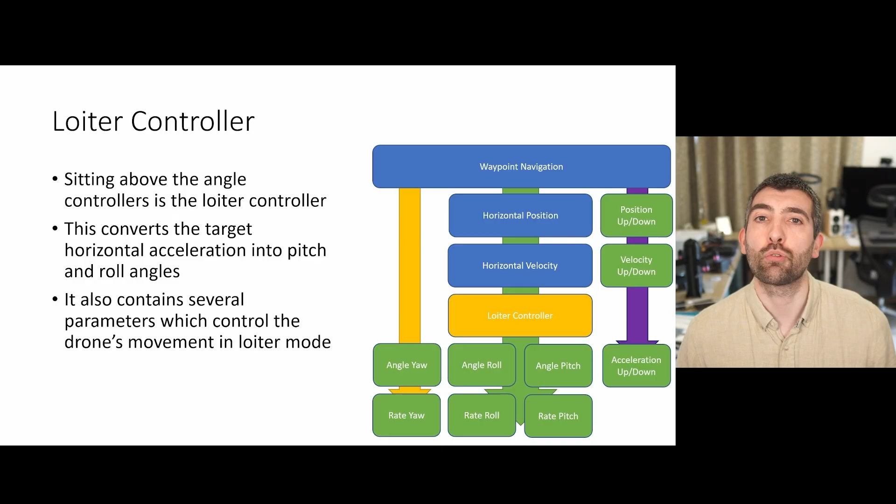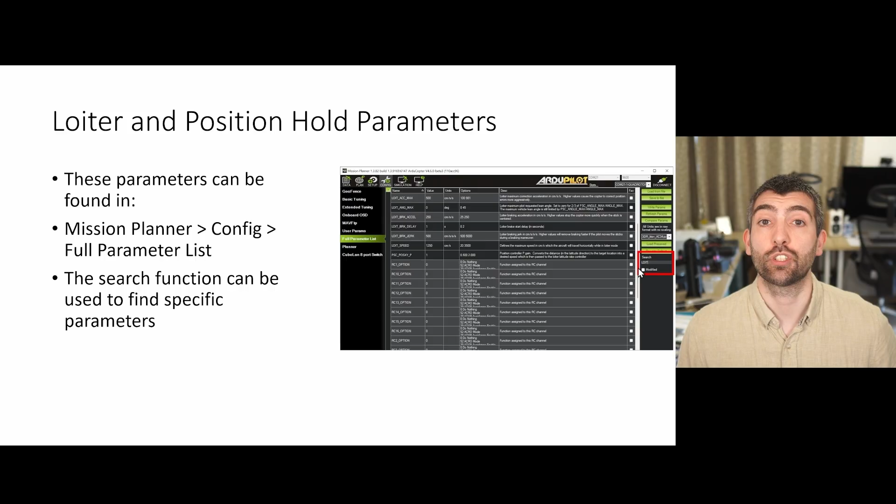So we're not going to have to tune the PIDs for the Loiter Controller, but we are going to have to look at these secondary parameters which control how the Loiter Controller behaves in order to get the right flight feel for the drone. All of the parameters we're going to be talking about today can be found in Mission Planner under the Config tab, Full Parameter List, and then you can use the search box to zero in on the specific parameters that you need to adjust. Here are the parameters that you're going to need to be aware of.

The first is LOIT_ACC_MAX, which is the maximum acceleration that the Loiter Controller is going to use to correct position errors. The higher this acceleration, the more rapidly the drone will move to correct position errors and the more aggressive it will be. LOIT_ANG_MAX is the maximum lean angle in position hold mode, and this is usually set equal to ANGLE_MAX so that the flight feel in stabilize, altitude hold and loiter mode is the same for the pilot because they have the same maximum tilt angles in all the modes.

LOIT_BRK_ACCEL is the maximum braking acceleration that the Loiter Controller will use when the stick is centered. So if you're flying along with the drone at a certain speed and you center the stick, the drone will brake to slow down, and the LOIT_BRK_ACCEL parameter controls how aggressively it brakes. There's also a LOIT_BRK_DELAY if you wanted the drone to not respond immediately to centering the stick. In most cases, you're going to want to set this to 0 because there is nothing more scary for a pilot than requesting the drone to slow down and it not respond immediately.

LOIT_SPEED is the maximum speed that the drone is going to travel in loiter mode. So at full stick deflection, that's how fast the drone is going to move. And LOIT_BRK_JERK is the maximum braking jerk.

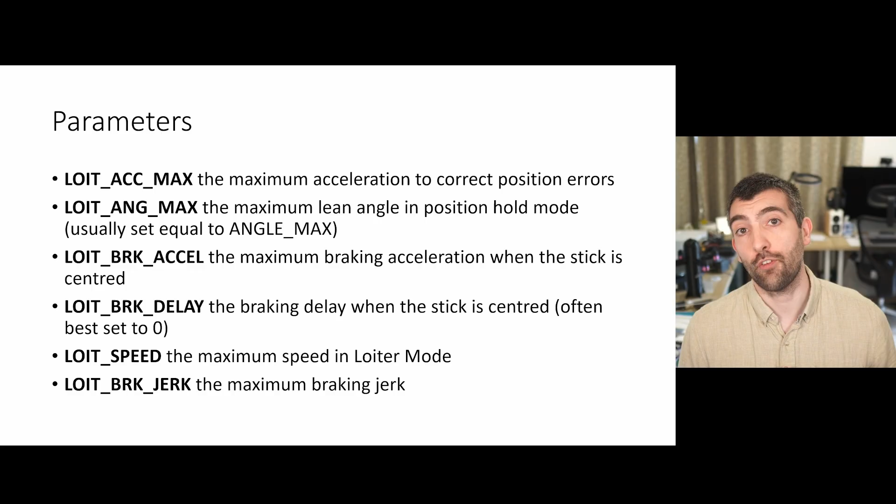Now, jerk is the derivative of acceleration, and we're going to come across this with a lot of the other controllers. This effectively controls how quickly the drone reaches its maximum braking acceleration. So the higher the jerk value, the faster the drone will reach its maximum braking acceleration, and then it will slow down.

I think it's easiest to understand these parameters by looking at them on a graph of speed versus time. So here we have the drone moving along at its maximum speed, so its loiter speed. Then on this yellow arrow, the pilot centers the stick. At this point, Loit brake delay controls how long the drone waits before starting to respond to the fact that the stick has been centered. So I would normally set this to 0, obviously, so that it responds immediately.

Loiter brake jerk will control how quickly the drone starts decelerating and how quickly it reaches its maximum deceleration value. The maximum deceleration value is controlled by Loiter Brake Accel. And then the drone will decelerate at that constant rate of deceleration all the way until it's nearly stopped.

And then Loiter Brake Jerk also controls how the drone kind of finishes off the deceleration and comes to a dead stop. The larger the value of Loiter Brake Jerk, the more rapidly the drone will come to a dead stop at the end of its braking maneuver, and the less drift you'll see at the end of the move.

So these parameters are not really parameters that are tuned in the traditional sense, because there's no ideal value for a particular drone. It all comes down to the application and the pilot feel, how you want the drone to feel when it's flying around in loiter mode as to what these values should be.

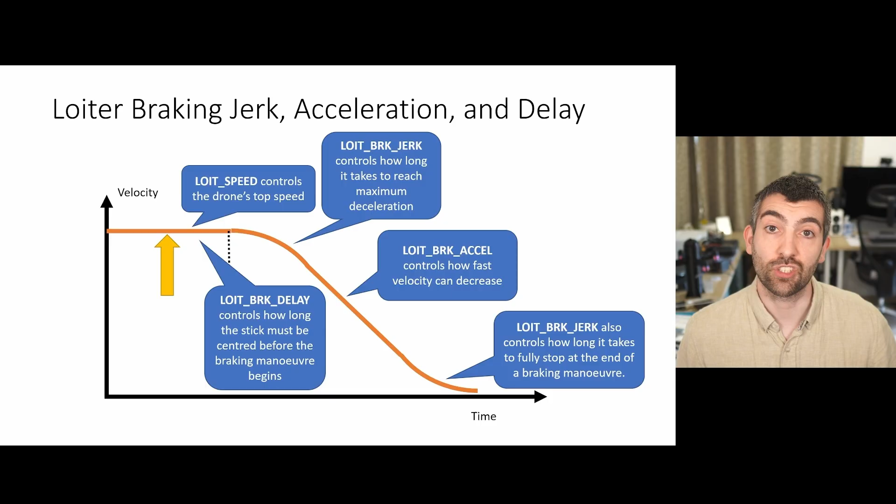The tuning flights for this video are going to be conducted in loiter mode or position hold mode. And what you're going to want to do is to take off and then line the drone up north-south and east-west. And you're going to want to do some runs north-south, where you just fly the drone to the north, then immediately fly the drone back to the south as quickly as possible, and just go north, then south, then north, then south a few times with sharp changes of direction at the end of each of those legs.

Then you're going to want to do the same in the east-west direction. So move east and then change direction sharply to fly west and back and forth. Do this without yawing the drone, so keep the drone pointed in one direction as you do these kind of shuttle runs. And then you're also going to want to do some moves where you climb as fast as possible and then descend as fast as possible.

And again, you want to go up and down a few times with the sharpest possible change of direction at the top and bottom of those moves. In all cases, just a few meters back and forth or up and down is sufficient. You don't need more than that. And you want to capture the log so that we can review it and see how the drone is performing.

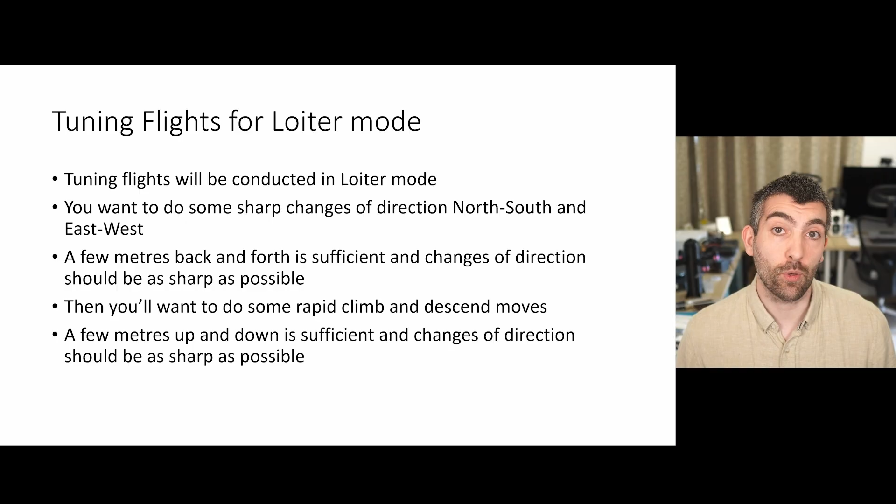Sitting above the Loiter controller is the horizontal velocity controller. And this takes a horizontal velocity and converts it into a target acceleration, which is passed to the Loiter controller. Now, this is another PID controller, so there are a number of terms that we can adjust, and you'll find them all in the full parameter list under PSC_VELXY_PIDFF, and then there's also the error filter and derivative filter parameters as well.

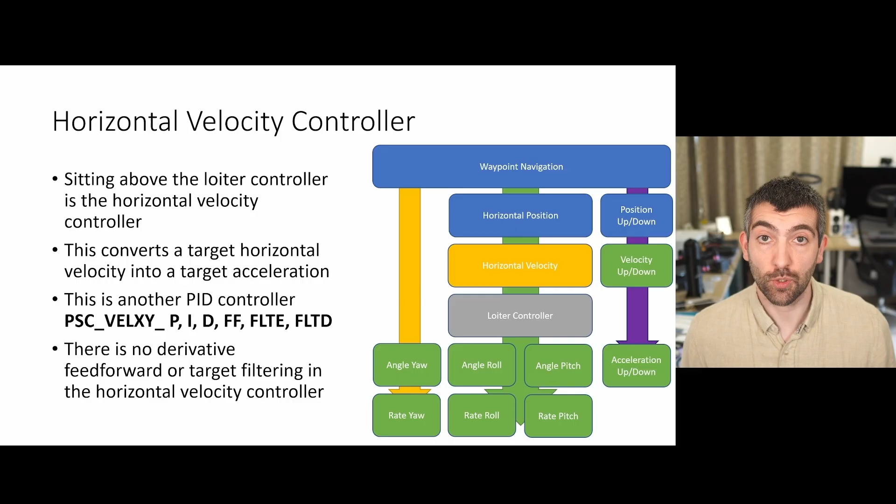You'll notice there's no derivative feed forward or target filtering in the horizontal velocity controller, so we won't need to worry about any of that in this case. But tuning these PIDs can be important to get the drone to behave as snappily as possible and to track the velocity set point as close as it possibly can. Once you've done some tuning flights in loiter mode and you've done those north-south and east-west movements, you should have plenty of data in your logs to tune the horizontal velocity controller.

You can find the time series data you need in the PID-E section, E for east-west, or the PID-N section, N for north-south. So that's why we did passes in both directions. And you should be able to tick the target for target velocity and actual for actual velocity to see how the controller is performing. Now, ideally, your actual velocity should sit nice and closely on top of your target velocity, perhaps ever so slightly delayed, and the actual velocity peak should be the same size, the same value as the target velocity peak.

Now, at this point in the video series, you should be pretty familiar with tuning PID controllers based on time series data. So I'm not going to run through all of that process again. You can just watch some of the earlier parts of this video series where I go through that in detail. You're going to tune the horizontal velocity controller PID loop just like you have all the previous PID loops using time series data. You're going to adjust the PD balance to address any overshoot.

So if we have a big overshoot where the actual far exceeds the target, you're going to reduce the P gain and maybe increase the D gain. And if you've got a very sluggish, slow response where the actual never reaches the value of the target during the sharp changes of direction, then you're also going to want to increase the P gain and reduce the D gain to address that.

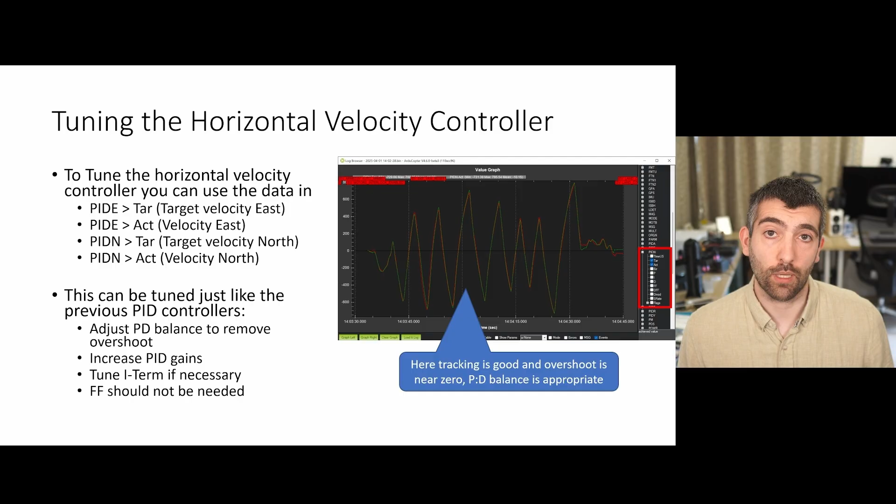You can tune the I term after that if necessary, although in many cases you won't need to tune the I term. And feed forward you shouldn't need to touch for the horizontal velocity controller because it's not a loop that typically requires any feed forward.

Sitting above the horizontal velocity controller is the horizontal position controller. And once you've got the velocity controller well tuned, tuning the position controller shouldn't be too difficult at all because this is a simple proportional controller. It's only got a P term, and that P term is PSC_PSCXY_P. So there's just one parameter here.

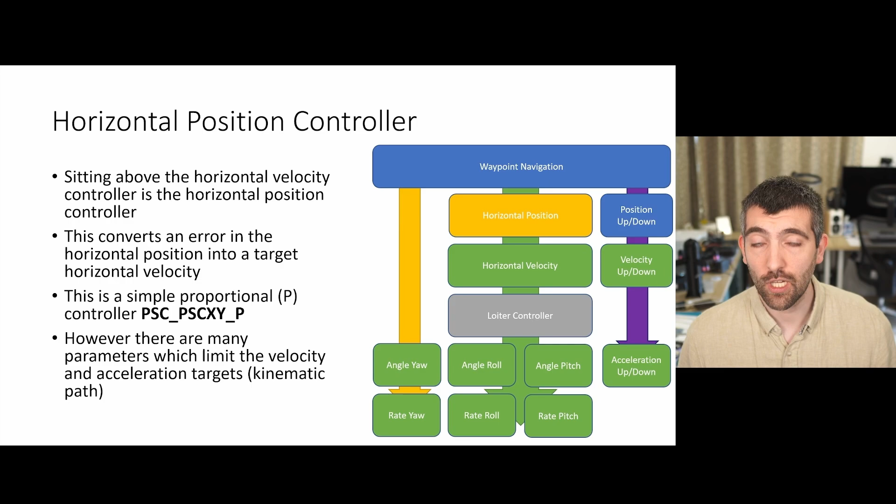However, there are many other parameters which limit the so-called horizontal kinematic path that the drone can follow. So while the PID controller for horizontal position is easy to tune, it is really worthwhile learning all about these other parameters which will control how the drone behaves when it's following a horizontal path. The parameters with the biggest effect on the horizontal movement of the drone are LOIT_SPEED, LOIT_ACC_MAX, and PSC_JERK_XY. And I think these are easiest to explain with the help of a chart.

So LOIT_SPEED controls the maximum speed that the drone moves in loiter mode. And so that's pretty easy to understand and pretty easy to tune. Just have the drone move at its maximum speed and decide if that's fast enough for your application or you need to change it. LOIT_ACC_MAX controls the maximum acceleration in loiter mode. So that indicates how fast the drone is going to accelerate up to its maximum speed. You can have a very high speed, but if acceleration is very low, it's going to take the drone a long time to reach that maximum speed.

PSC_JERK_XY is a more subtle parameter. It controls how fast the drone reaches its maximum acceleration. So that controls how quickly it gets going from a stop, and also how quickly it finishes accelerating as it approaches maximum speed. If you increase PSC_JERK_XY, the drone will have a snappier response. It'll be particularly noticeable how fast the drone gets moving when it's hovering, and then you move the stick, the drone will start accelerating and start moving more quickly with a higher PSC_JERK_XY value.

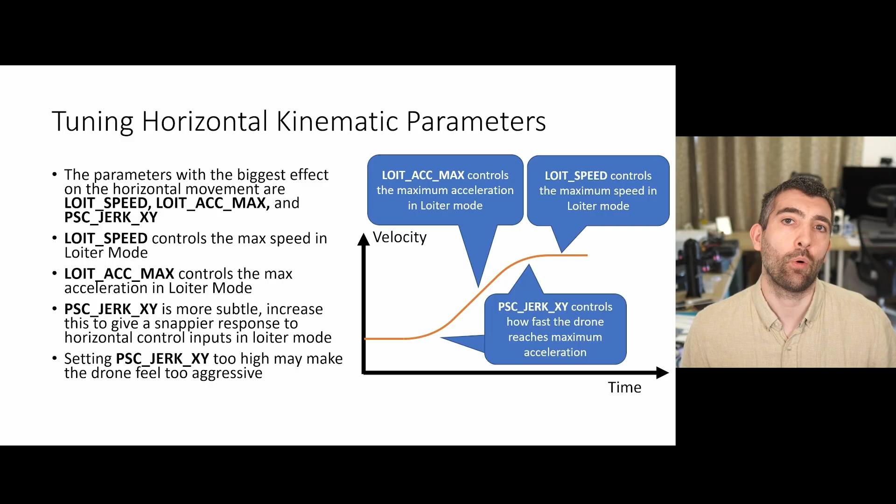If you set this too high, the drone may feel too twitchy and too aggressive and may tilt over really aggressively and suddenly when you start to move the stick to ask the drone to accelerate. So obviously that's something that you're going to have to just tune for yourself based on flight feel, your specific application, and how you want the drone to fly. It's more of a pilot feel parameter.

Once you've got the parameters for the horizontal kinematic path generation set correctly, then usually the drone should be performing really well in loiter mode. However, you always want to check the horizontal position controller just to make sure that it's not oscillating or overshooting or anything like that. Usually the default values are okay, but it's always worth checking.

To tune the horizontal position controller, you can use the data in PSCE for position east-west, or PSCN for position north-south. Obviously during the tuning flight, you'll have done some movements north-south and some movements east-west, so you can check both of them. You want to tick on target position east and position east, or target position north, depending on which you're looking at. And then just check that your actual position is following the target position nice and closely.

If you're seeing significant overshoot or oscillation, then you might want to just reduce PSC_PSCXY_P, just to control that a little bit. Similarly, if you're seeing that really the drone is not responding to the change in target position, you may want to increase that a little bit and see if it helps.

In general, the default should be pretty good. So if you're needing to change it a lot, that might indicate that your drone is very different from the default settings, or that there are issues elsewhere in your tune. Here you can see that with the default value, I've got good tracking and overshoot is non-existent. So the P term is appropriate.

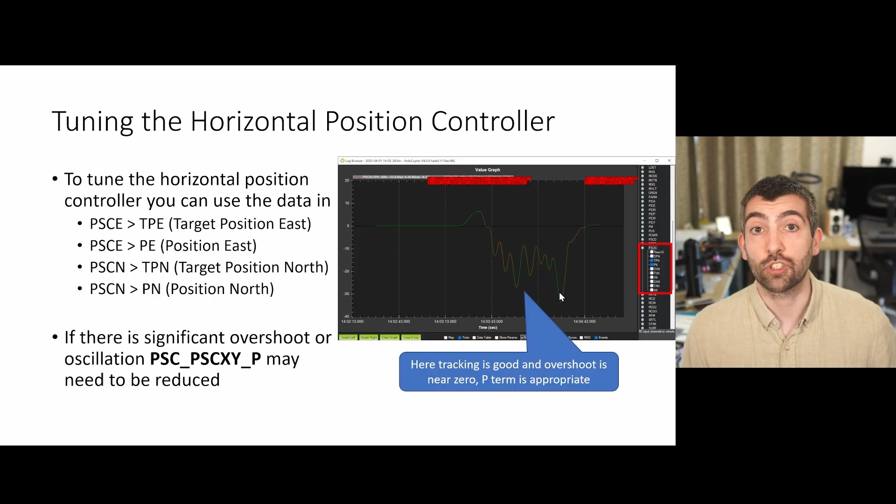Sitting above the vertical velocity controller is the vertical position controller. We've already covered tuning this in a previous video, but there are a lot of additional parameters which limit the velocity and acceleration targets for the vertical controllers. And this is called the kinematic path. And in this video, we're going to cover how to adjust those parameters to control the kinematic path. And we're also just going to very quickly recap tuning the vertical position controller as well.

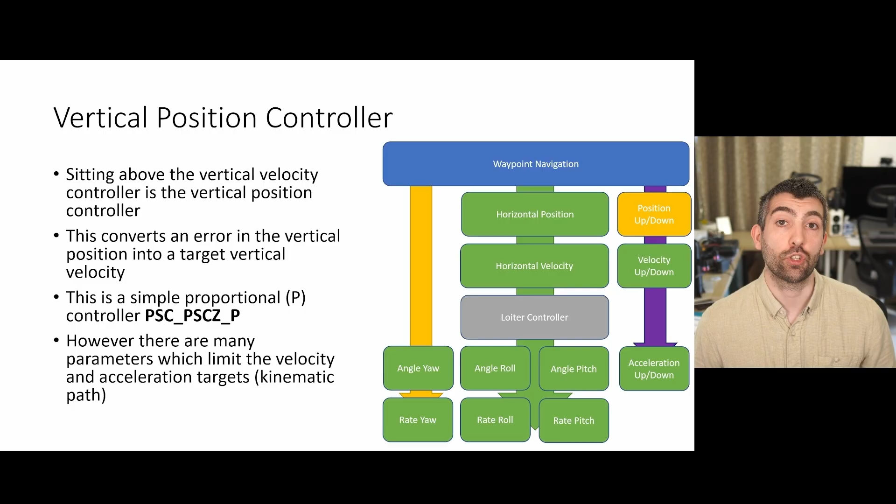Tuning the vertical kinematic path parameters is really important for giving the drone the right flight feel when you're giving it vertical control inputs to change altitude. The parameters with the biggest effect on the vertical movement of the drone in ArduPilot are PILOT_SPEED_UP and DN, PILOT_ACCEL_Z, and PSC_JERK_Z.

Now, pilot speed up and pilot speed down are pretty self-explanatory. That controls the maximum vertical speed of the drone under pilot control, and there's two separate values, a maximum speed when climbing and a maximum speed when descending. Typically, you'll set the maximum speed when climbing higher than the maximum speed when descending because no one wants the drone dropping too fast. That could precipitate a crash.

PILOT_ACCEL_Z controls the maximum vertical acceleration under pilot control that the drone is ever going to have. So if we look at this chart here, which shows velocity against time, you can see that PILOT_ACCEL_Z controls sort of the maximum rate of increase of velocity.

PSC_JERK_Z is a bit more subtle. That controls how fast the drone reaches its maximum vertical acceleration. Increasing this value will make the drone feel more snappy. It'll get moving more quickly when you give it an instruction to climb or descend.

Setting PSC_JERK_Z too high may make the drone feel too aggressive. It may feel like it leaps when you tell it to climb, or it drops very suddenly when you command it to descend. So you're going to need to tune that to make sure that it's the right balance of responsive whilst not being so snappy and so responsive that it makes the pilot nervous.

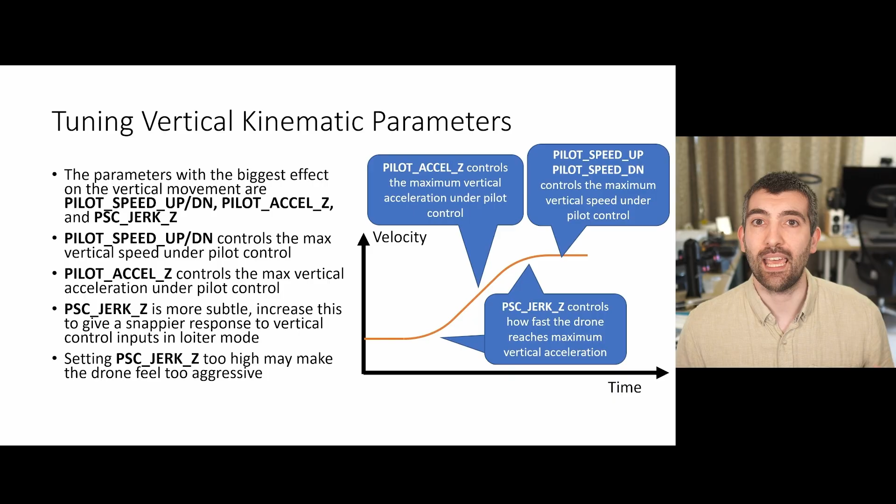Once you have the parameters set for the vertical kinematic path, you can take a look at the vertical position controller. And again, typically the defaults are fine here, but it's always worth checking just to make sure you're not seeing overshoot, oscillation, or a very sluggish response.

To tune the vertical position controller, you're going to use the data in PSCD, which is position down, and you're going to tick on target position down and position down so that you can see the target and the actual of what the drone is doing. There's only a P term in this controller, so just check to see if there's significant overshoot or oscillation, and if there is, reduce PSC_PSCZ_P a little bit to control that oscillation if it's there.

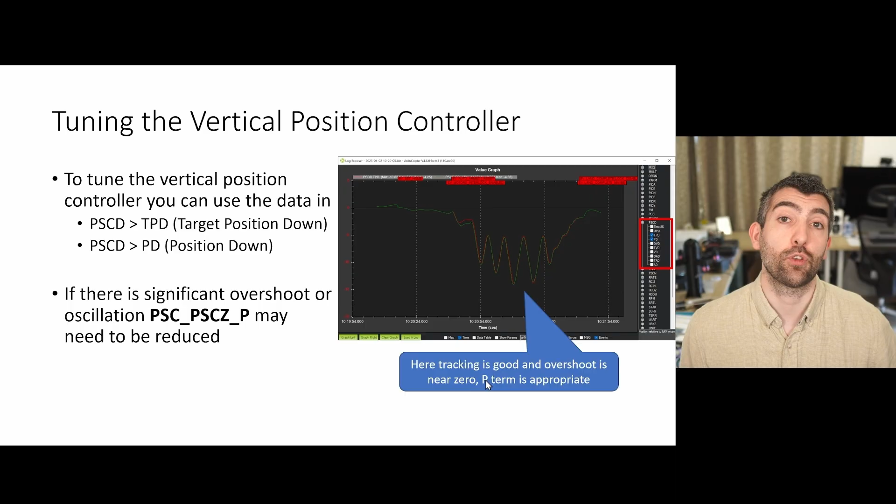If the drone is very, very sluggish and the target is way ahead of the actual, then you might want to try just increasing that P term and see if that helps sharpen up the response. Here is a log that I took with just the default P gain, and you can see that tracking is good and overshoot is near zero. So the default P term is appropriate for a typical 8-inch drone. Obviously, if you're tuning something much bigger or smaller than that, you may need to give it a bit of a different value.

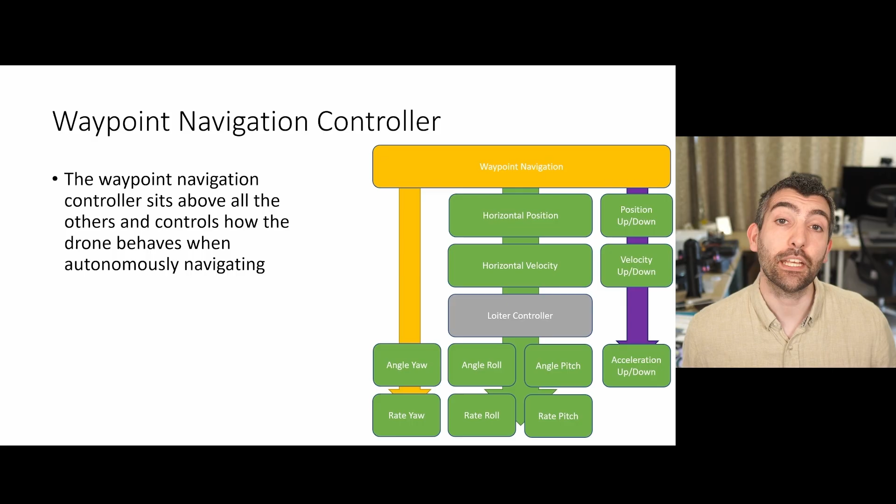The Waypoint Navigation controller sits above all of the other controllers that we've talked about so far, and it controls how the drone behaves when it's autonomously navigating. All of the parameters for Waypoint Navigation can be found in Mission Planner, in the Config tab, full parameter list, and they all start with WPNAV_. So if you search for that text string, then you'll find all of the Waypoint Navigation parameters. Again, there are no PID controllers in Waypoint Navigation. What we're looking at is parameters that control how the drone behaves when it's navigating between waypoints.

Let's start by looking at the parameters that control the horizontal kinematic path generation in Waypoint Navigation mode. These are the same type of parameters that we saw with the horizontal position controller. They're just called something else because now we're looking at autonomous waypoint navigation rather than pilot control. We've got WPNAV jerk, which controls how quickly the drone reaches maximum acceleration and how fast it gets going from a standing start. This parameter can be quite important for how fast the drone can navigate between closely spaced waypoints, because obviously the drone is going to have to accelerate and then decelerate, and WPNAV jerk controls how quickly it can do that.

WPNAV accel controls the drone's maximum horizontal acceleration. So if you've got quite closely spaced waypoints or moderately spaced waypoints, then this value can have a big impact on how long it takes the drone to reach its top speed and therefore how quickly it's able to navigate between those waypoints. WPNAV jerk also controls how quickly the acceleration tails off once you get close to WPNAV speed, which is the cruise speed that the drone is going to hold between waypoints. If you've got distantly spaced waypoints, WPNAV jerk and WPNAV accel may not be too relevant for how long it takes you to navigate between the waypoints. WPNAV speed is going to be more important.

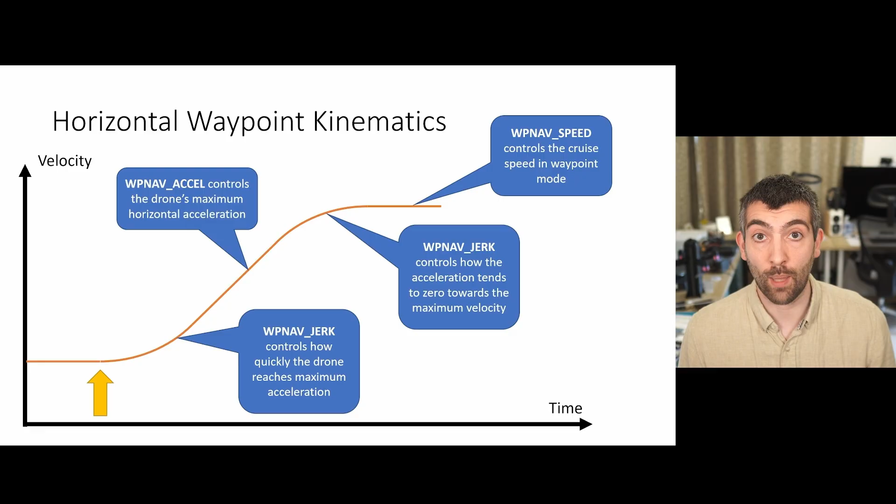WPNAV radius and WPNAV accel C are important parameters that control how the drone behaves when it gets close to and hits a waypoint. WPNAV radius controls how close the drone needs to get to the waypoint before it's marked as hit. Once the waypoint is marked as hit, the drone will then go on to the next waypoint and start heading towards there. So if you set WPNAV radius very large, you might find the drone doesn't get all that close to the waypoint before it then turns and heads on to the next one.

WPNAV accel C controls the drone's maximum centripetal cornering acceleration. And this has an effect of both controlling the corner radius, but also controlling the maximum speed that the drone can move through the corner. So if you have a tight corner, the drone will actually slow down to take that corner in order to keep within the maximum cornering acceleration. So if you increase that value, that can allow the drone to take tighter corners more quickly.

If you set that to a low value, you're going to end up with the drone either moving very slowly through the corner, or you're going to have corners with large radii so that the drone can keep moving at a high speed without having too much cornering acceleration.

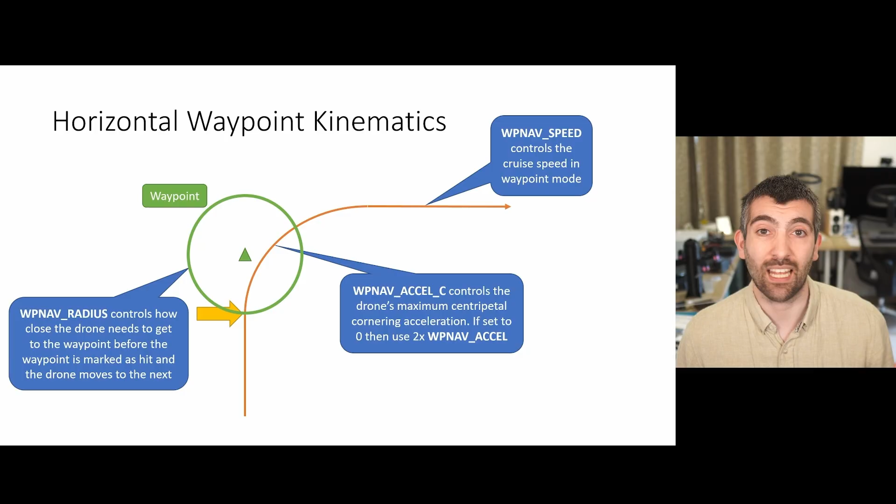Again, these parameters are more tuned by flight feel and by how the drone is performing in the autonomous mission that you need it to complete. So there's not an ideal value. There's only an ideal value for your application, which you'll just find by trying increasing and decreasing these values and seeing how that affects the autonomous navigation performance of the drone.

There are, of course, also parameters that control the vertical kinematic path generation in autonomous navigation mode. And some of these parameters are actually shared with the vertical position controller, and some of them are separate depending on whether you're doing waypoint navigation or pilot control. PSC_JERK_Z is just shared with the position controller, and it just controls how quickly the drone reaches its maximum vertical acceleration. That's going to be already set because you will have already set that for pilot control.

WPNAV_ACCEL_Z controls the maximum vertical acceleration of the drone under autonomous navigation. And so you could set that to be the same as under pilot control, more or less, depending on your application. And then you also have WPNAV_SPEED_UP and WPNAV_SPEED_DN, which are precise analogs of PILOT_SPEED_UP, PILOT_SPEED_DN, which just control the maximum vertical speed in autonomous navigation mode.

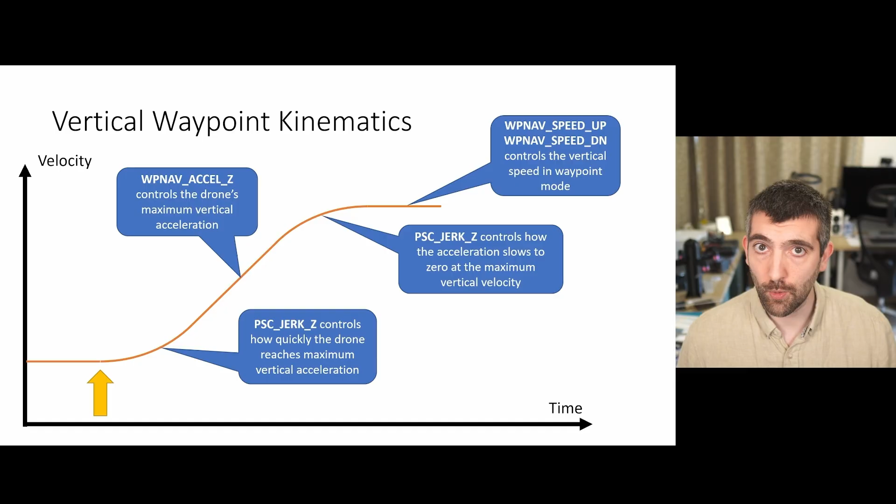And again, I would probably set the up speed higher than the down speed so that you don't have the drone dropping really quickly, because obviously that could precipitate a crash, especially because you want to give a pilot the opportunity to take control back from the drone if it's doing something wrong. And if the drone is dropping very quickly, the pilot's not going to have much chance to take over control before a crash.

In many cases, it's appropriate to set the parameters for the autonomous waypoint navigation to be the same as the equivalent parameters for the pilot navigation, because often you're going to be tuning the drone under pilot control and you may not have an autonomous waypoint mission to test the tune. So you're going to set it up so that it's appropriate for pilot control and then just use the same parameters for the waypoint navigation. And you should find that the drone behaves exactly the same under autonomous navigation as it does under pilot control. And in many cases, that's going to be the ideal outcome.

If you followed along with the tuning series up until this point, you should have a drone that is safe and responsive to fly, whether you're flying it in a manual mode, a fly-by-wire mode like stabilize or loiter, or whether you're navigating autonomously. And you should also know about all of the parameters that you need to adjust and how to adjust them to get any hobby grade ArduCopter drone flying brilliantly.

If, however, you're looking to tune something larger for a professional application, then you may still benefit from learning about some of the extra tools that are available in ArduCopter and some of the extra parameters that you can adjust in order to get these much larger drones flying even better. And it's particularly important for big drones that are flying in demanding applications like commercial or industrial applications where the tune needs to be spot on, even in difficult weather conditions.